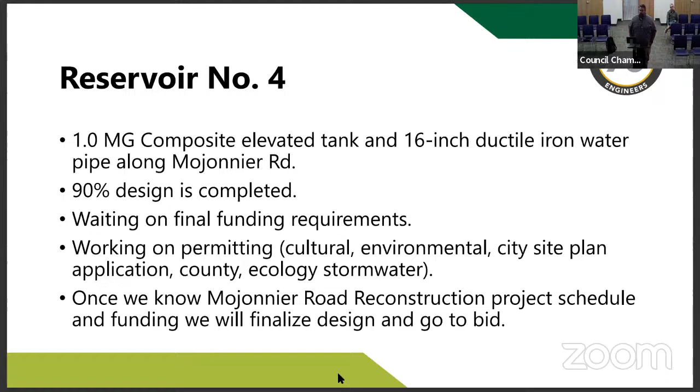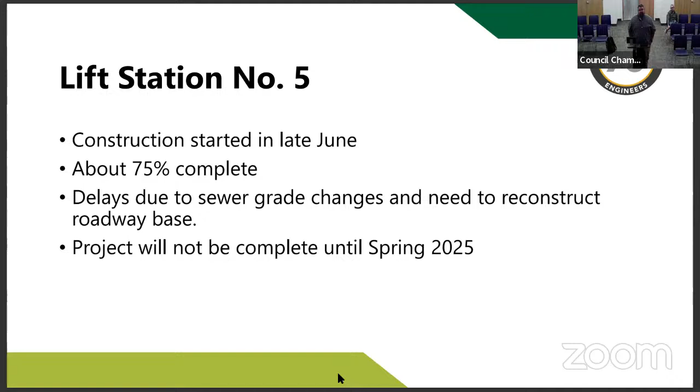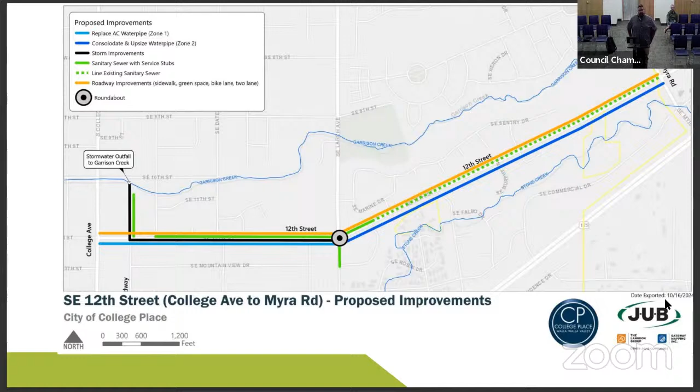Since your intertie connection with the city of Walla Walla at Myra Road is there, we felt it would be good to put a large diameter transmission main in that road so that in case you need to use that, you have the hydraulic capacity to provide water for the city through there - kind of a redundancy and resiliency for your water system. So we met with funding agencies and they gave us some ideas of how we could potentially phase the project and strategize for how we might fund this project in the future. Now we're preparing some applications for the design phase of the project, thinking the design would probably occur over 25 and 26, and then likely construction sometime around 27. So we'll be working on getting some funding so that we could make this project a reality.

Next slide, I think that might be it. So that's an update of the things we've been working on and the things we'll continue to work on next quarter. Thank you for this report.

Let's see if we have any questions for Mr. Fazzari. Let's start with Commissioner Williams. Any questions? I don't have any questions. That was an excellent report. Thank you. Commissioner Tessman, no question. Thank you. Okay, I don't have questions either. Appreciate it. Online, Commissioner Larson - oh, she's joined us already. Very good, Commissioner Larson, no questions at this time. Thank you. Okay, thanks so much.

Then our GIS folks made some pretty cool maps. This is just a heat map that shows the density of the comments we're getting. So a lot of comments in this area with respect to general comments overall, more down in this part of the community. Another map is the pedestrian safety comments, and you can see where there's a lot more comments with respect to pedestrian safety.

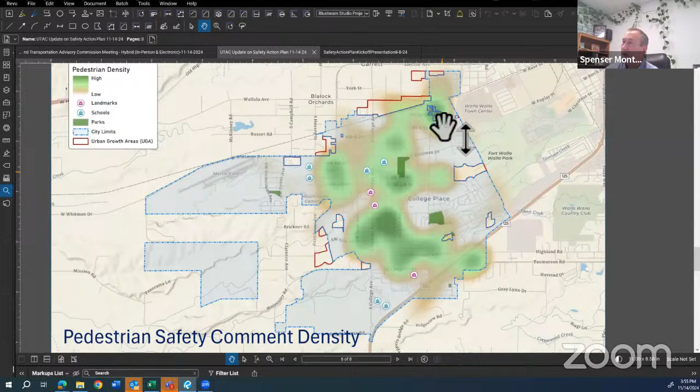So the next steps for us are to keep doing our work, looking at the accident data, sifting through the comments, trying to come up with some projects and then prioritizing them. But we'd like to get back together with you again before your next regularly scheduled meeting in February. If we could get back together with you in January, that would help us facilitate our public process and meet some of the grant requirements of finishing in time, but more so to finish in time so we can be eligible to submit one of our projects for federal implementation funds next summer.

What we'd like to do with you at that meeting is go into more detail about the comments we've received, review the collision information we've been able to go through, the projects we've identified, go through the prioritization process, and there's already been a Target Zero statement that's been adopted, but we want to review that with you as well, and then prepare for receiving some public feedback on this whole process.

So that was the last slide I had. I was asked to keep it short, give you an update, just let you know that we've been doing some work. But I'd be happy to answer any questions you may have and get some feedback on when we might be able to have a workshop with you.

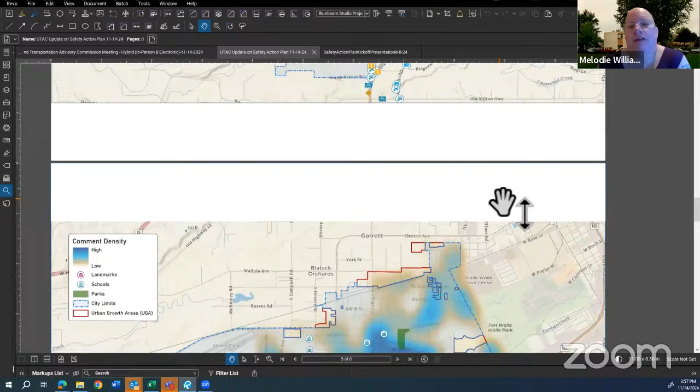I guess I'll think of a different way to say my question. Are all the comments associated with a point? I can understand people might have comments that weren't necessarily geographic. So did they have to drop a pin even if they wanted to say we should have a slower speed limit everywhere? I think they do have to drop a pin, but we're going through all of these general or other kinds of questions. And there was a general comment category, and those will be summarized in the work that we're doing.

Just as a point of interest for everybody, because I found this shocking, I'm in Arizona, in Phoenix right now visiting my daughter. And for the first time in my life, I saw a school zone speed limit 35 when flashing. I was like, that hardly seems helpful. Anyway.

Thank you, Commissioner Tessman. No questions, thank you for the presentation. I don't think we want that safety evaluation team here in College Place, whoever's doing that in Phoenix. Nope. Yeah, okay.

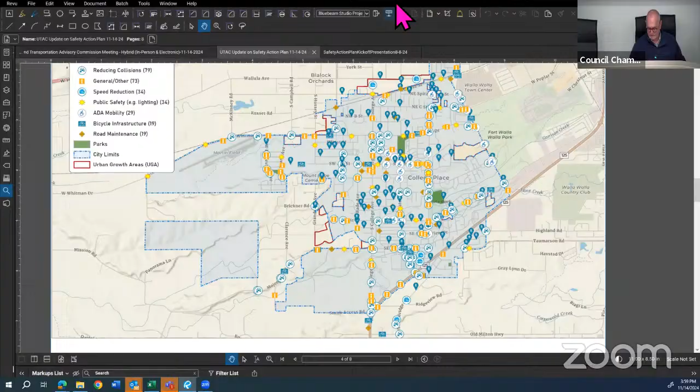Again, my presentation is nowhere near as glamorous as Mr. Fazzari's. I apologize for that, but I'll touch on some of the projects we're working on that don't necessarily involve JUB. The first two I'll touch on aren't necessarily utilities or transportation. They're two park projects, but I figured it was worth noting.

That's the Lions Park. As we're all probably aware, that project is well underway. It's going pretty well. For a while there was a lot of underground work and efforts that weren't as noticeable to the public, but I think things are getting three-dimensional now, and hopefully folks are seeing the progress. Like any project, there's been a few minor hiccups, but I think we're still definitely on track to wrap it up this spring and be open for next year.

So we're all excited about that one. The other park project actually does involve JUB a little bit. It's just in its early stages of design, but that's the Veterans Park project, where the plan out there at Homestead in that park is to add pickleball courts, basketball courts, restrooms, and a new playground. So total revamp of that park that's kind of underdeveloped at this point. I think that'll be great.

But moving on to more utilities and transportation stuff, Majonier Road, we've talked about several times. Moving along, we were in a right-of-way acquisition phase, working with our consultants to move that forward. We have, I believe at this point, 4 offers out. There's still some more to get ready to go out, but I think we're hopeful that the rest of the offers will be out this month or early next month. And then it's kind of discussions with property owners and figuring that stuff out. With any luck, we'll wrap up the right-of-way acquisition in the springtime and be ready to be moving forward with construction next fall, most likely. So, again, you never know how the right-of-way stuff goes. There could be delays, but...

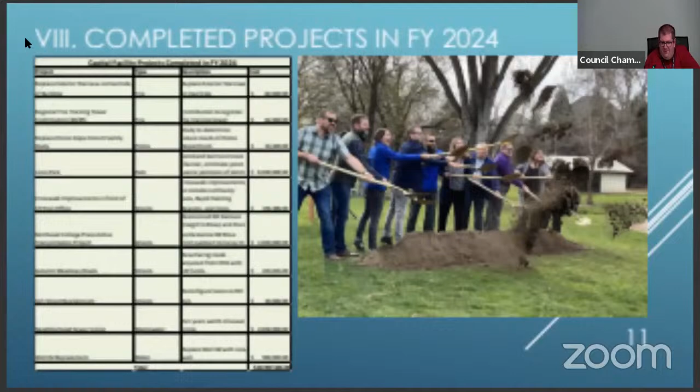Page 11 has the projects completed this year in fiscal year 2024, and there were a wide array of them: the Damson Street reconstruction, we're counting on Lions Park wrapping up, and then the sewer lining project class stuff going on.

Page 12 goes into the summaries of essentially the projects and the generalized split. So as you can see, in fiscal year 2025, a large percentage, about 36%, is water. That's followed by streets at 27, and then wastewater at 15, and then storm at 14, and then it gets reduced at that juncture.

Going on to the 6-year outlook, the lion's share of the investment needed is streets at 37%, and then that's followed up by water at 19%, wastewater at 13%, and then parks at 11%, and then it goes down from there.

Page 13 has essentially the split of costs for the various functions for next year. Page 14 has the same for the 6-year outlook. And then page 15 essentially has how we're proposing a payout for all of it.

If you look for all projects, whether it's high, medium, and low, the total need is about 182 million. 64% of that cost is estimated to be borne upon grants and then developer contributions. About 36% of that is local funding in and of itself.

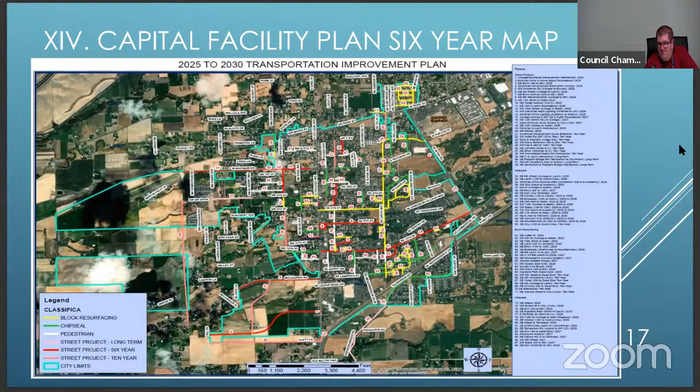First, functions are facilities. So as we go into page 19, first is City Hall, and that's really realizing the vision of when this building was originally planned for, because they pared it back way back in the day when they did a councilmanic bond and it fit within the amount available. They built what they could, but original plans had it going out to like College Avenue for additional space. So really it's realizing that vision.

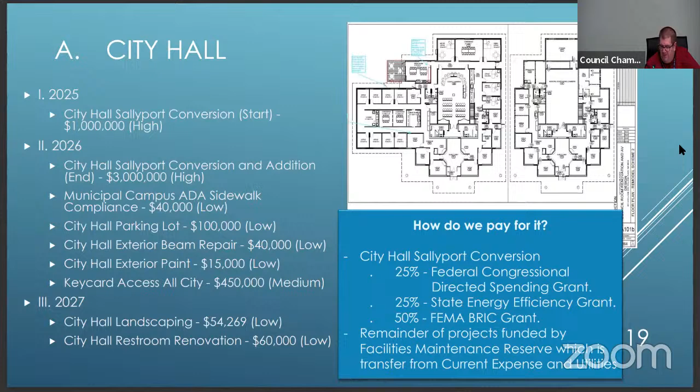And we're trying to get some congressional directed spending dollars, energy efficiency, and then FEMA money to make that a reality. Page 20 is the fire department.

With the fire department, since the Climate Commitment Act is still in effect, we ended up getting an earmark last legislative session to do a pretty dramatic upgrade with lighting and any of the HVAC stuff. So that'll be paid for by that earmark, and they'll cover all of that. Then any remaining items like dorm room furniture, things like that, essentially that's just paid for out of the reserve. And money for fire department.

Page 21, police department. At least as of right now, that ballot measure is still not passing. Since the last count was done, one thing is that it did pass the amount of voter turnout above 40%. Now it's 45%. However, for voter-approved bonds, there needs to be a super majority, so 60%.

It's trending in the right direction. I'm not sure we'll get there though. Last count it went up from 48 yes to 49.5 yes, but there's still countywide about 4,800 votes left to count. So technically it's possible, but if you map the trend line,

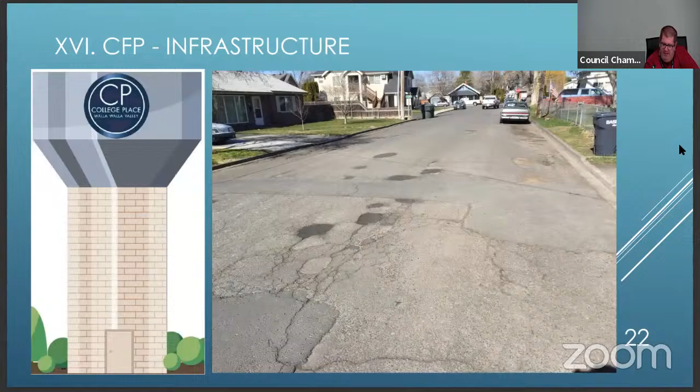Now getting out of facilities as we get into parks. So page 24, Veterans Park over in the Homestead area, we did get a recreation conservation office grant, and we're in consideration for another one, and then we've put in for some additional private grants, but the vision there is to make that more of an active park.

So putting in a basketball court, pickleball court, commercially rated playground equipment with a military theme, moving where all of that is at in said park, and then putting down appropriate turf where it's more like a multi-use field for soccer. So we're getting there with the engineering, but we're trying to move to a construction phase in the next year.

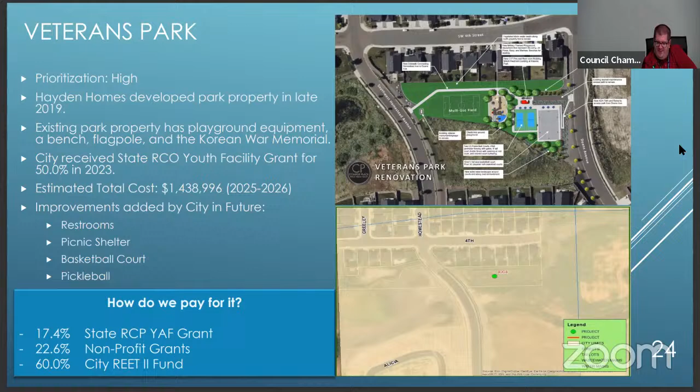Page 25, Lions Park Community Center. That one, similar to some other projects, is really about trying to get earmarks together. So the idea here is that with Lions Park being renovated, we're trying to make sure the building matches the park, because right now it wouldn't. But make it more of a multi-use facility with childcare, library branch, and commercial kitchen.

And then community rooms. So we do have a Department of Commerce grant for about $2.5 million, and a variety of earmarks. And then to make sure we didn't have to go through a lot of arduous regulations on federal and state level, we were able to get the County .09 grant program and pay for the architectural plans. So the goal is to start on the architectural plans shortly, and we're negotiating a contract now on that. And then you can see the other park projects, but they're in subsequent years, so nothing of criticality on that.

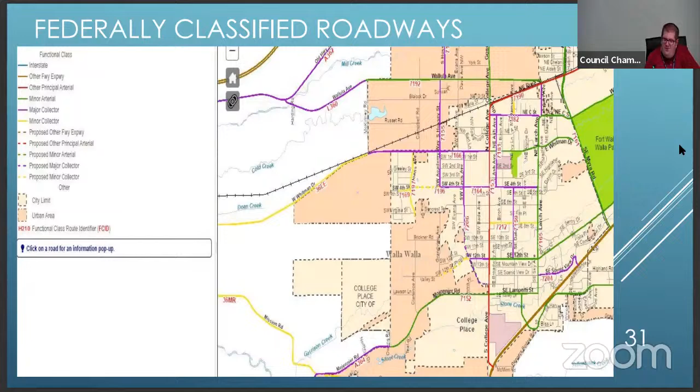Page 31 has a map of the federally classified roads. So those are ones that qualify for a lot of the Transportation Improvement Board and State Department of Transportation grants. Any of them, they're yellow, purple, red, green, ones of that nature. Page 32 is full corridor projects, so that's ones where we're redoing the roadway, but also the infrastructure underneath.

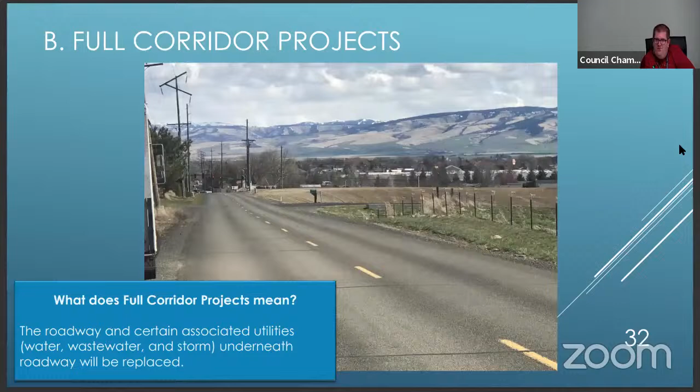Page 33 covers Mojonnier Road. Right now we are in the right-of-way acquisition phase, and really until we get that buttoned up, it'll hold up the construction. But we have tax increment financing dollars, and a lot of that is matched by congressional directed spending from Cathy McMorris Rodgers at $2.5 million, money from the MPO, and then also a Transportation Improvement Board grant.

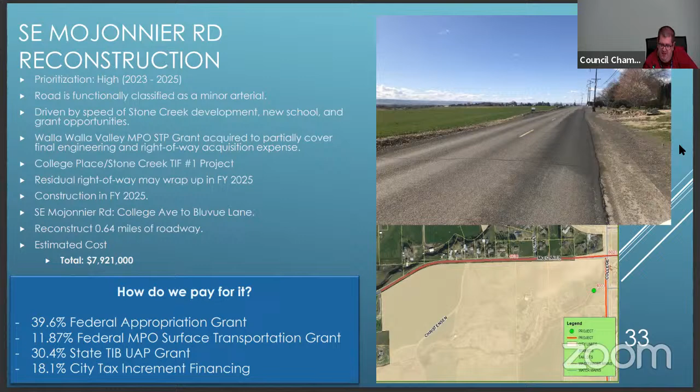So we are moving on the critical pathway, make that a reality. Page 34, the east-west road. That one, essentially what we're into that for, and that's a TIF project, is engineering it, and then essentially give some funds to the developer representing across the property to the east of them. But that road will link to the eventual new intermediate school and other public activities. So that's a pretty critical pathway right there.

Then there's other corridor projects, but they're in future years.

Now getting into storm projects, page 40, we have the Decant facility. So that's right now being paid for, where we have it proposed. We made an earmark request, Walla Walla 2050. It is in their proposal to stay off of the Columbia River. And then we also put in for some ecology funds to match that. So we'll see where that goes.

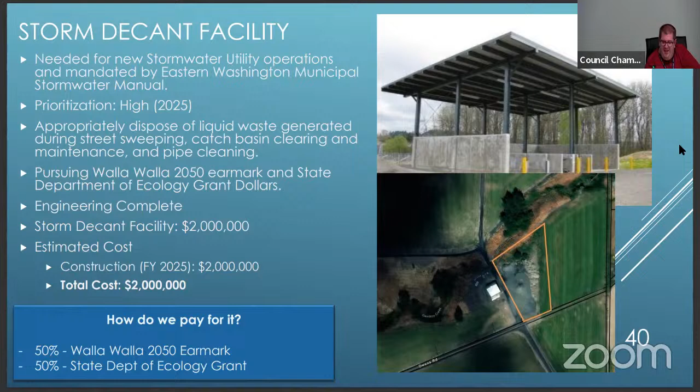Page 41 is Birch Avenue. So we put in for Public Works Trust Fund, and that's to redo the road from 4th to 6th with sidewalks, and also 6th Street and some of the associated infrastructure underneath that.

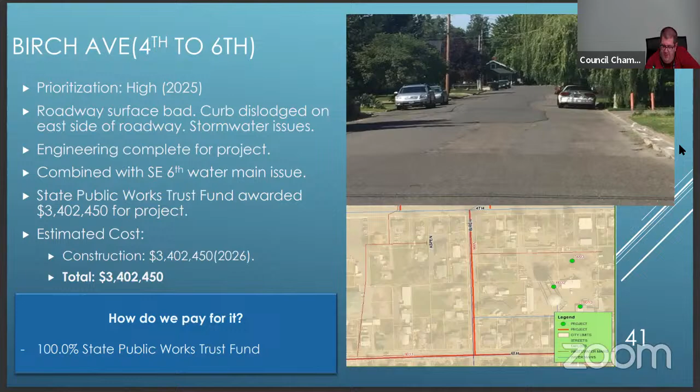Then as we get into that, page 43 is Public Works Yard Storm. So we have funds from Ecology to cover engineering, and then moving forward on the appropriate improvements.

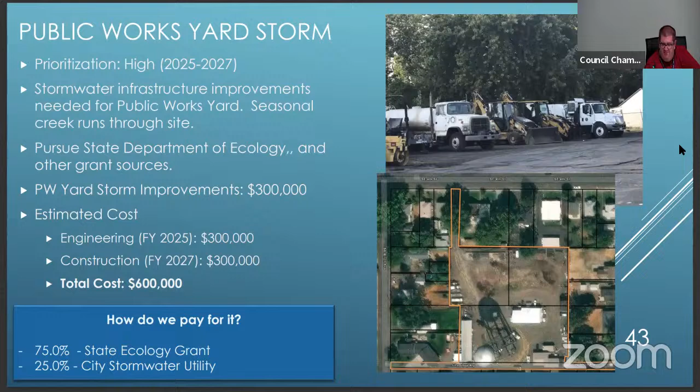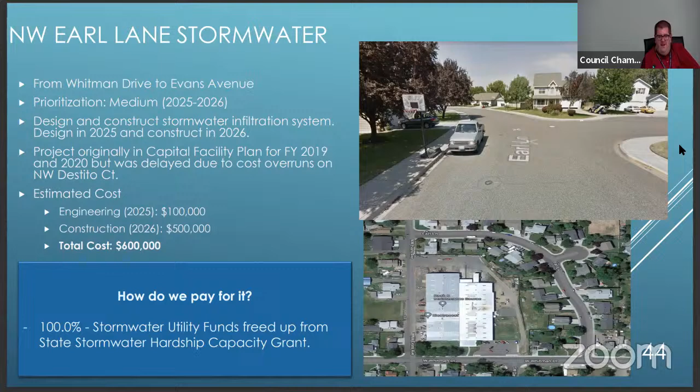Page 46 is stream gauge installation. So putting that in both at the entry and exit of Stone and Garrison Creek and out of the city, because if we get that data, we'll likely be able to qualify for PL 566 money. It could pay for a lot of storm infrastructure, but where the study that the feds paid for was left at is that we need to quantify the benefit, and the only way to do that is with gauges. So that'll provide the tool to do so.

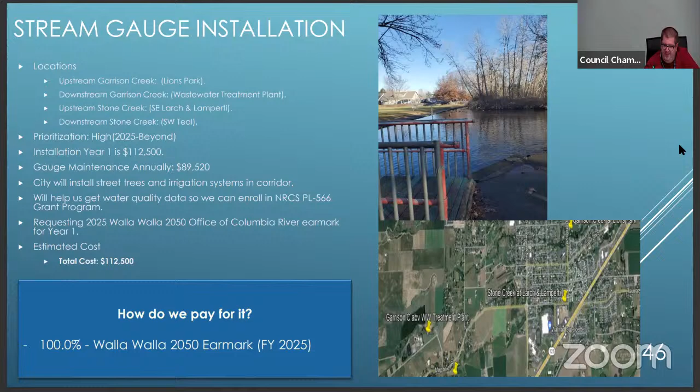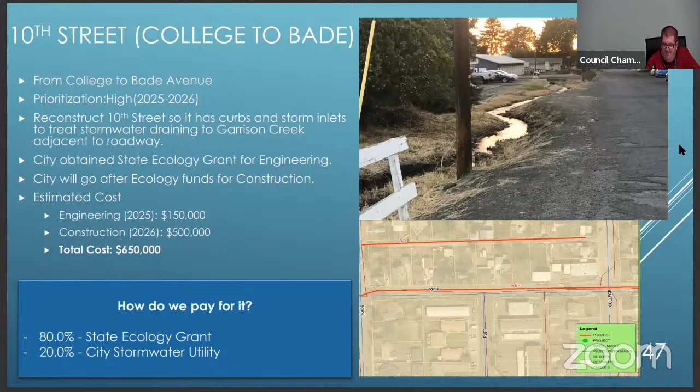Page 47, 10th Street. So this is a companion to the improvements we did a couple years ago on 10th east of College Avenue. So engineering that so it has appropriate curb and gutter and fix it up. So moving forward on that.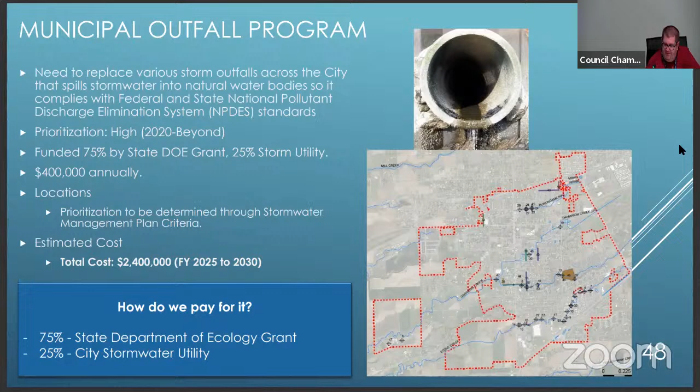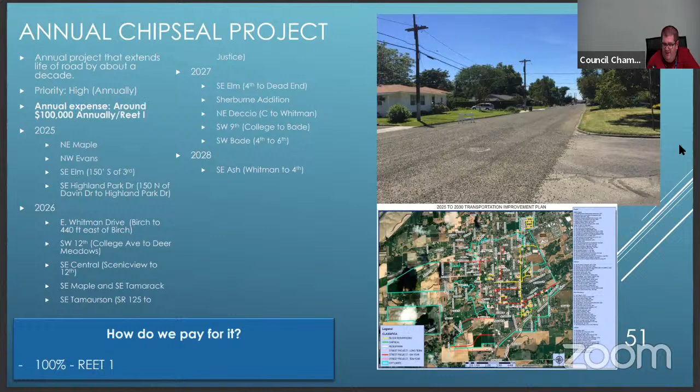Now we get into streets. If we go to page 51, with that, we have the chip seal program, and there's streets listed there that gets additional useful life out of our roads, and REET 1 pays for that.

Page 52 is block resurfacing, and a couple of years ago we did that pavement inventory, and that's spelled out a way to systematically start to attack some of the roads where that would get additional useful life. So you'll see the transpiring of that on this page.

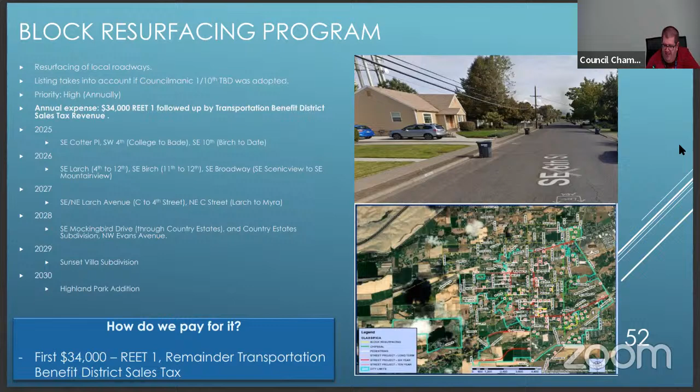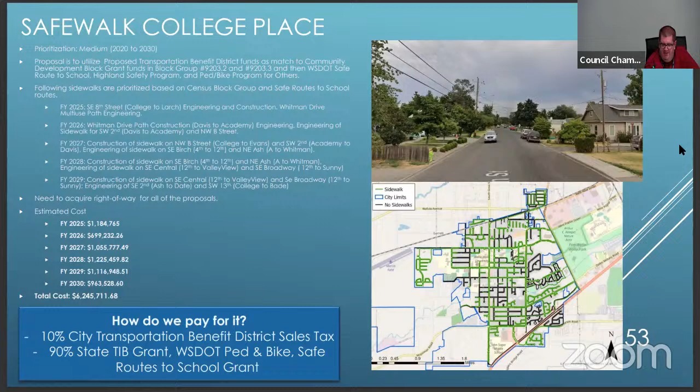Page 53 is Safe Walk. Historically, that was paid for by community development block grant dollars. Now we have a local road safety plan. A lot of this is paid for either by Ped and Bike or Safe Route to School money, or even the active transportation program of Transportation Improvement Board. Next year, you'll see finally putting in the sidewalk on 8th Street to connect downtown with Lions Park, and then to begin to prep the engineering of the gap of the multi-use path on Whitman between Davis and Academy. And that one is actually an MPO grant that's floating that.

Page 54 is downtown parking lots. That's paid for with a TIF district. We end up acquiring our first piece of property across the street in the middle of the block, and we're working on some additional appraisals and then land acquisition, but making that a reality to facilitate reinvestment in our downtown corridor.

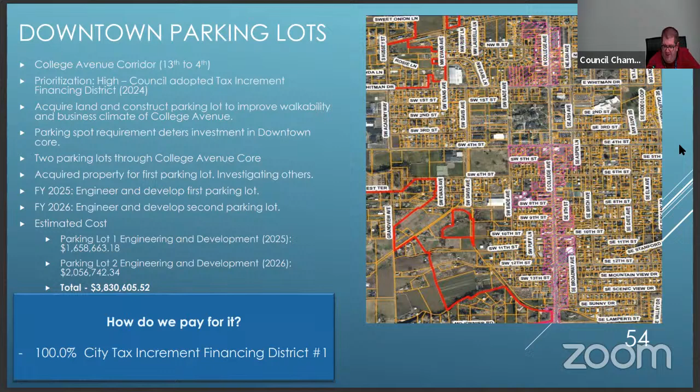And then page 56, so engineering is going to be going shortly on that, but developing a solution to make Lamperti and College safer, because over years we've had cars and other things go over the wall at Lamperti, so getting that fixed up.

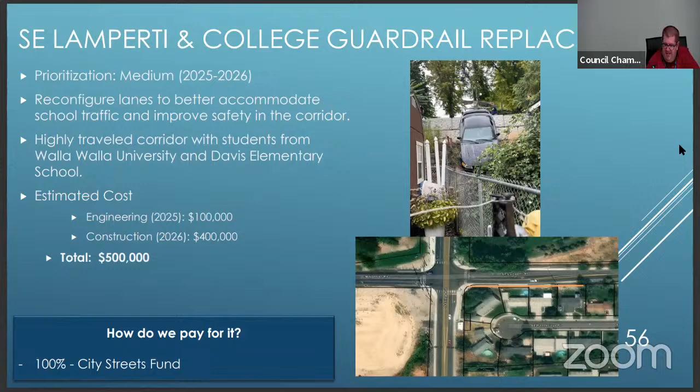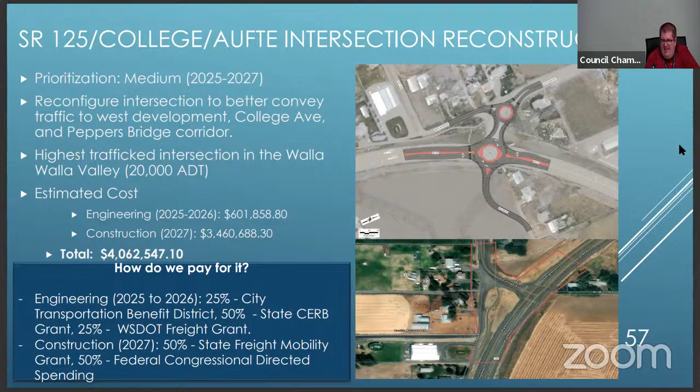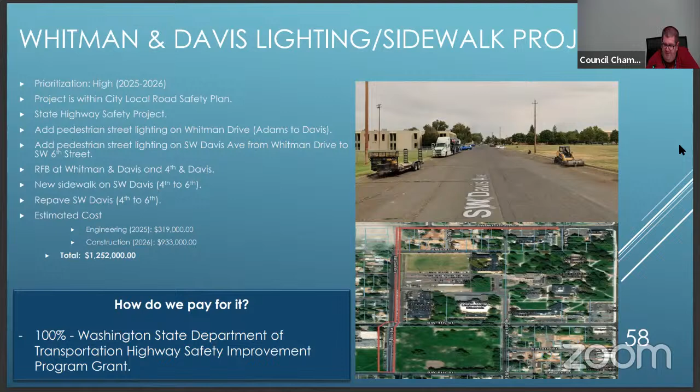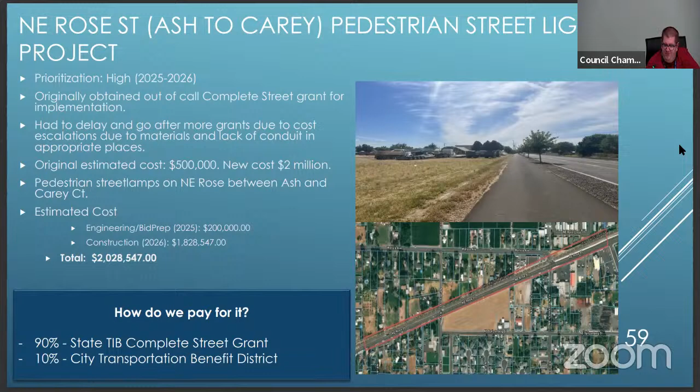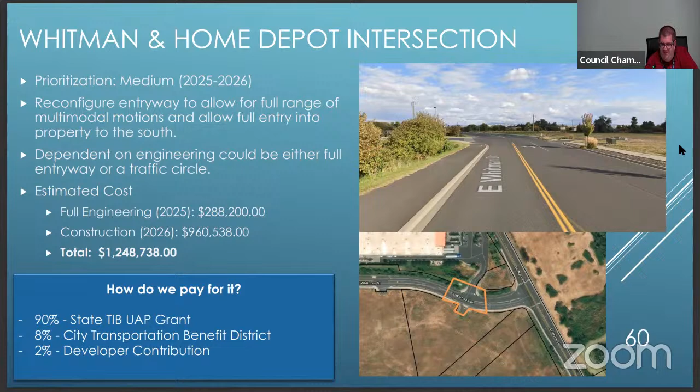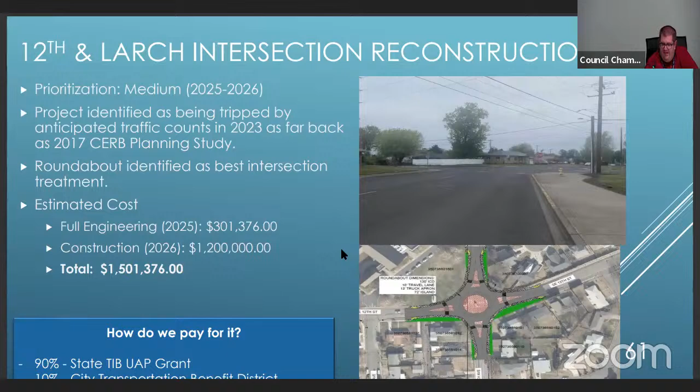On page 61, we have a grant in for converting 12th and Larch into a roundabout, which has been discussed over a number of years. There are other road projects as you move on through the years.

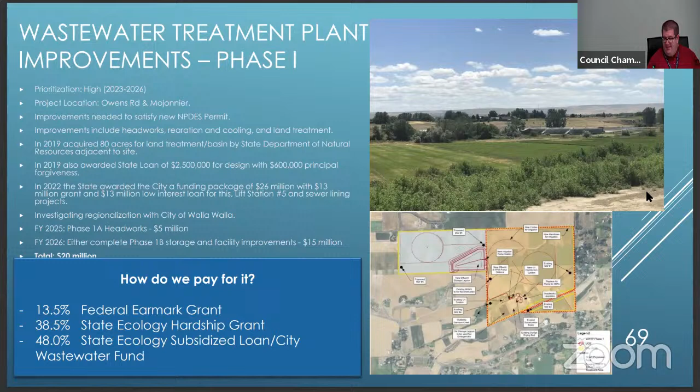Now we'll go to wastewater, page 69. You'll see the wastewater treatment plant project, which Alex went over at length, so just making that a reality. A lot of that's being paid for by outside dollars from the feds and the state.

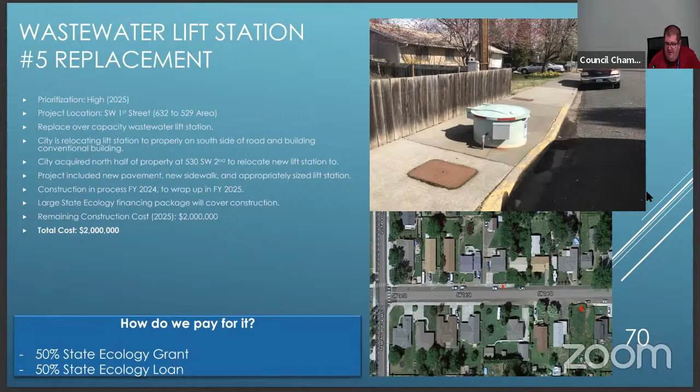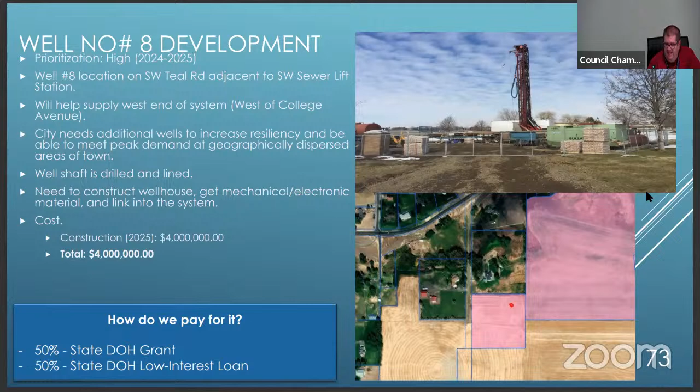Page 74 is the transmission main on Mojonnier Road that'll link up that new well and then eventually the new water tower in with the rest of the system, and you'll see the breakout there.

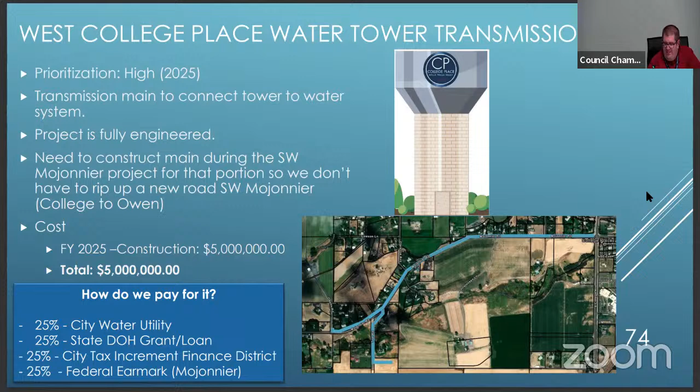Page 75, that one is reservoir number 4, the new reservoir of 1 million gallons, being paid for by a litany of Department of Health grant and loan dollars, and then also we end up in the Army Corps WRDA bill to get grant funds that way, and then also congressional directed spending to make that a reality.

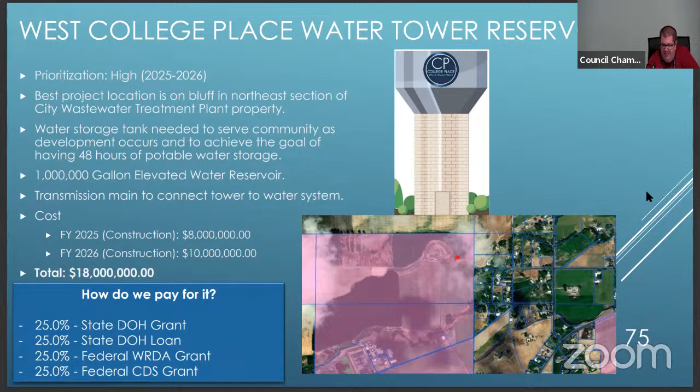Page 76 is the current old water tower, getting that seismically updated and then moving forward. Engineering is in process, and as we move past that, it'll be going into a construction phase. That's FEMA BRIC grant paying for that.

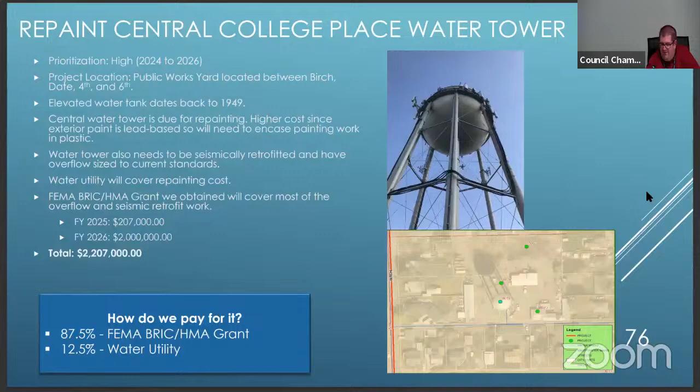Page 77, that's well number 3, the well on Larch and Lamperty that carried us through our various water crises over the past years, but it doesn't have an actual permanent generator. So getting a generator engineered, and making sure the equipment on that is synonymous with our other newer wells, so everything is on similar systems. There are other projects past that point that go into future years.

And then page 80 is the table of acronyms. And with that, that is the summation of the capital facility plan.

Questions? Covered a lot of ground. Thank you very much. Let's put it to our commissioners for questions regarding this capital facility plan.

Commissioner Larson? No questions, thank you. But I think he covered that much ground, so we couldn't remember to ask questions.

Thank you. Commissioner Williams? I've learned a trick from city council, write them down as you go.

So my question is kind of a big picture. Sorry, I'm trying to keep my daughter's cat from hanging up on you guys.

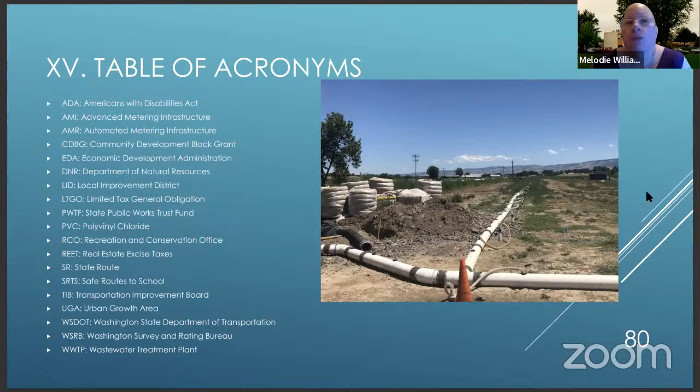Since we haven't started on the architectural drawings yet, is it possible to combine at least a police substation with our new city or new Lions Park building? I hate to wait 4 more years before we can do anything about the police station.

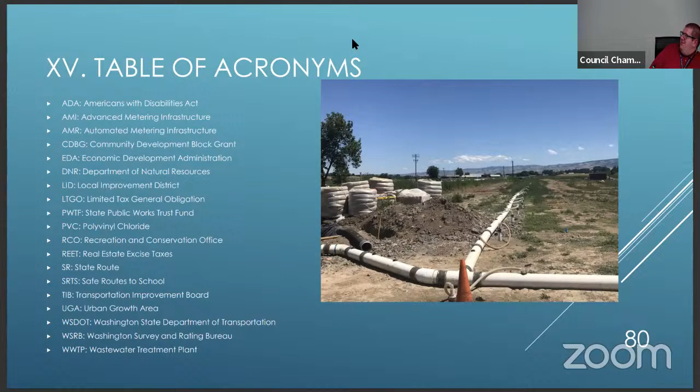I mean, hypothetically, you could. The only cautionary tale, which we would have to see how it plays out, is even on the early level drawings, all that other stuff I listed was already squeezed in pretty tight, so anything more would be pushing it. Also, we would have to check with the childcare people because the amount of regulations on that grant is ridiculous, so I'd have to see if stuff like that was even allowed within the same structure. I mean, anything probably is possible, but it'll need more research.

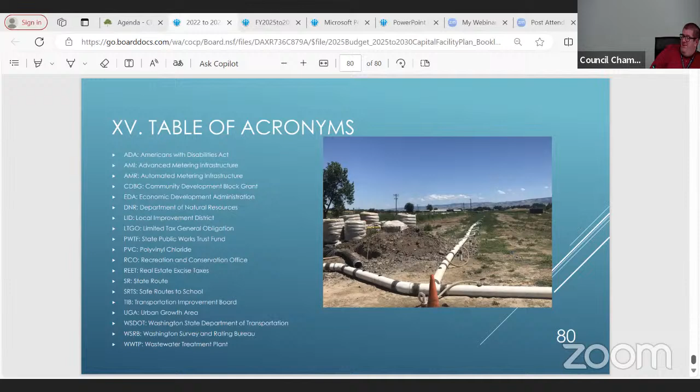The thing to note with that community center in general is it isn't like we have free reign of the park. During the Lions Park project, we went through a really weird process to exempt 9,000 square feet of the park as the park, because about 3 years ago the National Park Service decided to spot inspect us from the original grant that paid to do the park back in 1969. Back then, that building that's out there now wasn't there, and we had to go through a 3-year process because they were threatening to make us tear down the current building since it wasn't in the original rendition. We were successful getting it exempted, but I just want to mention the exempted square is about 9,000 square feet, so that's about how much room we have for our new structure.

And that's why, if you remember the proposal, we had it go 2 stories, because the only way you could fit all of that was going up because of that square footage limit. So if we want to add a police station, it would basically have to be a skyscraper. Pretty much at that point, yeah.

I know there might be concerns with having a police station around a park, although other people might like it. So I also assume we'll be looking at things like leasing a place or something. Yeah, those are all options too, but that's not part of the capital facilities plan. It's literally in here, where the police station is, and the ways of moving forward from available methods, but that's the limit as of right now. Yeah, that makes sense. I just wanted to throw that out there.

Commissioner Tessman: on page 13, following up on what Commissioner Williams said, before we take any action on the capital facility plan - on page 13 and 14, the expense for the police station, would that change based on the fact that right now the ballot measure is failing? Does that number on page 13 and page 14 change? On page 13, I already took the police station out for next year, just seeing where it was going. However, page 14 does not, because I still put in a placeholder 4 years out, taking it into account and adding an inflationary factor. So in the 6-year time frame, that is representative of a police station; the 1 year is not.